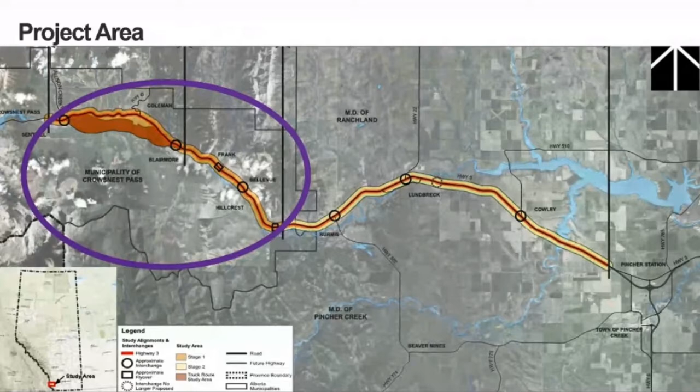So the orange part is generally through the municipality of Crowsnest Pass. This is a special municipality that was amalgamated in 1979. Coleman, Blairmore, Frank, Bellevue, and Hillcrest all came together and became one municipality. At the time, it had a total population of about 7,300 people. And it hasn't really been growing. In fact, it's been going the other way, and it's now down to about 5,500 people. But traffic volumes on the highway have been steadily increasing, which is how this project came about.

So because it's part of the National Highway System, Alberta Transportation has it designated as a future 4-lane freeway. Now, if you know anything about this highway right now, it's all 2 lanes. So there's a long way to go before we have a 4-lane freeway through here. But basically what they wanted us to do was to develop an ultimate functional plan for that long-term future when it's a 4-lane freeway. We came up with 110 kilometer per hour design speed. That's as high as you can go without having some big changes to the existing alignment.

We've got 7 interchanges and 1 flyover designated as future access across and to and from the highway, which is going to take a lot of service roads to accomplish because there's a lot more than 8 intersections through this 50 kilometers of highway at the moment. So there's going to be some major access management challenges involved with that. But then the big thing too was Alberta Transportation wants to know what their ultimate property requirements are, and this plan basically did that.

But I'm not going to talk too much about the freeway plan because it's a long way off. But what might happen in the somewhat near to medium future is the interim functional plan of twinning portions of this highway and doing some reasonable access management, not the full freeway-ification, but definitely consolidating some accesses. So that's what I'll focus most of the presentation on, the interim functional plan.

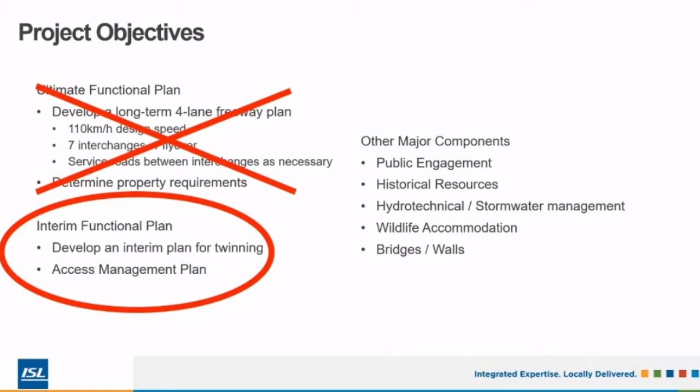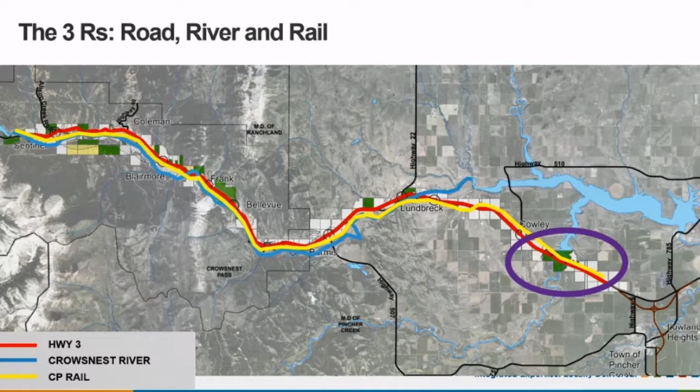You also might think, Jack, that sign doesn't look all that big. Don't you want to make it a little bigger so you can see it when you're driving down the highway? That text can't be more than 200 mils high or something. It's probably a lot smaller. But I guess the bigger you make the sign, the more susceptible it is to catching those winds. So they've got to keep it small.

All right, so let's look at the project stages. There's 3 distinct portions of this project, and I'm calling them A, B, and C for the purposes of this presentation; we had much more complicated names when we were actually doing the project. Stage A is the realignment around Coleman, and starts basically at the west end of the project limit and goes to Blairmore. It's about 10 kilometers long. That's completely new construction, building the new highway around Coleman.

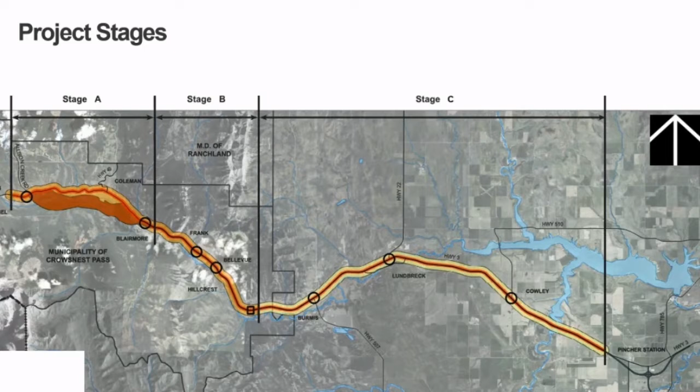Stage B is very constrained, mountainous, the most challenging part of the project from a design perspective, and it's all being twinned on the existing alignment. There's no major realignments. And stage C is once we get out of the mountains, it's a little flatter, a little more space, and just more wide open.

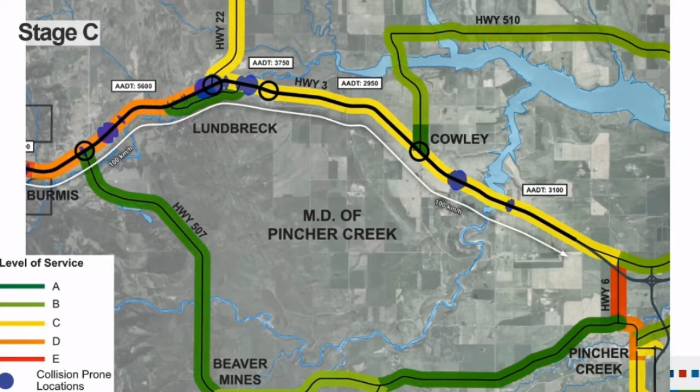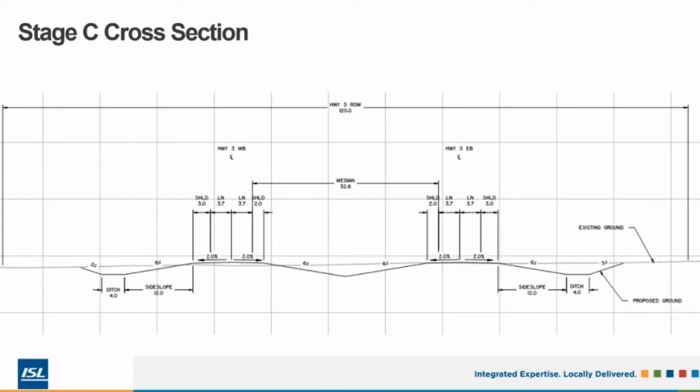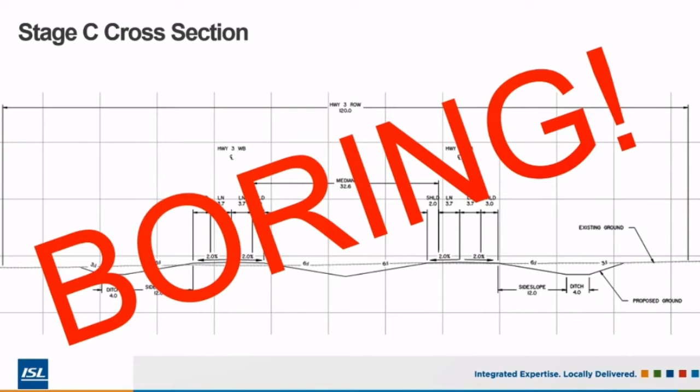And this is kind of boring. There's nothing really special or innovative about it. It's just a twinned highway, so not a whole lot more to say. So here's our recommended plan for Stage C. There's just a couple things that I want to touch on, and then we'll move on to the other stages.

But there's a vehicle inspection station just east of Highway 507. And so that can kind of stay while the highway is twinned, but as soon as you have to build an interchange at Highway 507, that vehicle inspection station really gets in the way. So we've got to shift it about 2 kilometers down the road to that wide space in the median we've created and put it right there.

The other hotspot that I mentioned is the Highway 22 intersection. And so to cool that hotspot off, you need a roundabout to manage traffic volumes there.

And the other major feature of this part is the Cowley realignment. So you'll see that the village of Cowley is right up against the highway. There's really not a lot of space to put an interchange in there in the future. And so we had to realign the highway around Cowley so that once you have an interchange there in the future, then you've got space from the interchange junction.

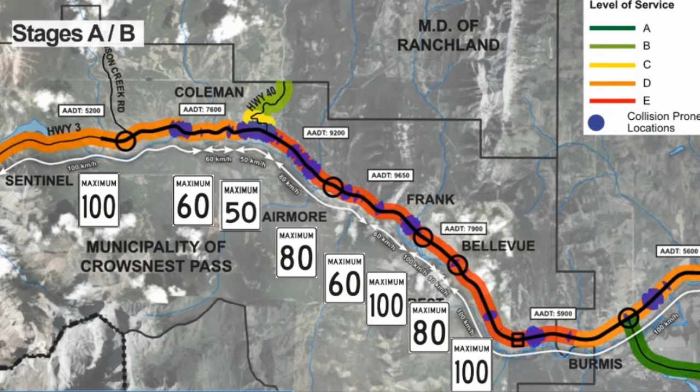Okay, going along, going around Blairmore, coming into Frank. Oh, 60. Ooh, okay, slow down. Oh, back up to 100. Back down to 80 through Bellevue, and then once you get past the Bellevue intersection, you're back up to 100. So not exactly a harmonious speed profile there, and really hard for drivers to remember what the speed limit is and drive accordingly.

So let's look at stage B. So here is the quintessential problem of stage B. We have a mine and a big rock cut on the north side. And on the south side, we have more rocks, some sloping, and the CP rail. It looks like we've got a fair bit of space. Like, yeah, we could probably widen to the south, stay away from that mine. It's kind of a tourist attraction. There's some geotechnical challenges with blasting rock away right where it's dug out for a mine. But there's the property line for CP rail, that fence line right there.

And it became apparent to us pretty early on in the design process that all of stage B really needs to hold the existing edge of pavement of the highway on the south, and widen all to the north. Because anytime you start going to the south, you start having to slope onto CP land, and they don't like that. That just opens a whole other set of challenges that we really weren't prepared to deal with.

So the cross section for Stage B was inspired mostly by what I like to call the Okanagan Special. This is the cross section that most of the new twinning in British Columbia in these mountainous regions has been in the last 15, 20 years. All the twinning they've done is pretty much this Okanagan Special.

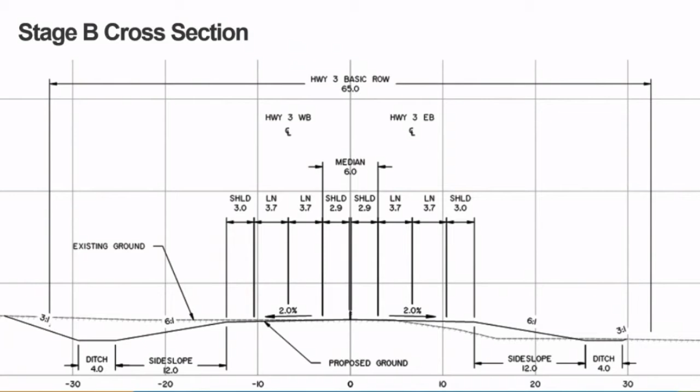The one major difference that I'll highlight here is a high tension cable barrier down the middle rather than concrete median barrier. Local officials and maintenance people were pretty wary about putting concrete barrier down the middle. They were very concerned about snow drifts and the high winds and stuff that the area is famous for. And so that's how we wound up with high tension cable barrier.

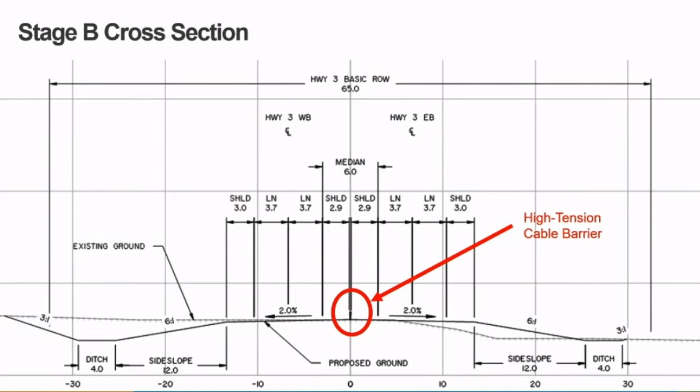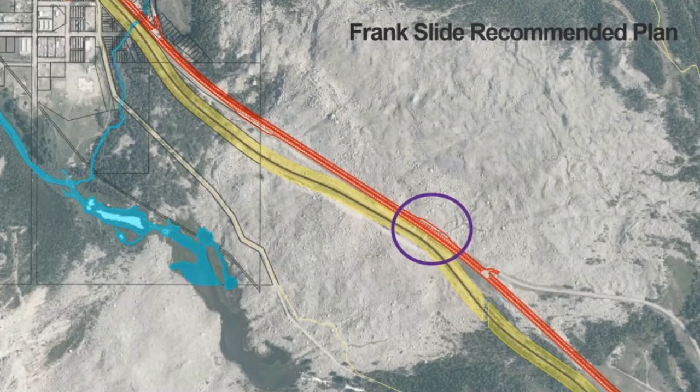So here's the recommended plan. And again, we don't know what kind of hoops are going to have to be jumped through in the future to make this happen, but because of the proximity of CP rail, hold south edge of pavement, widen everything to the north. And you'll see there's the pinch point with the CP right of way, where there's even a little part of the existing highway pavement that's technically on CP right of way, but don't tell them.

So now moving a little ways up the road, this is the current town of Frank. And it's pretty tight. So again, we've got the rail on the south, but then on the north now we have new challenges. We have private frontage, we have people's homes, we have people's driveways, we have businesses. And the right of way here gets down to about 27 meters. And if you'll remember, our twin pavement width is 26.6 meters. So we're really in tight here. So it's private frontage to the left of me, CP rail to the right. Here I am stuck in the middle with not very much space.

So shout out to McElhanney here, their 2007 study of the area took a look at this problem in Frank and what are we going to do about it? And their solution was, well, ultimately you're going to need a service road for Frank. And so let's make the existing 2-lane highway the service road, build the new 4-lane highway to the south, and completely relocate CPR in the process and just push them further south.

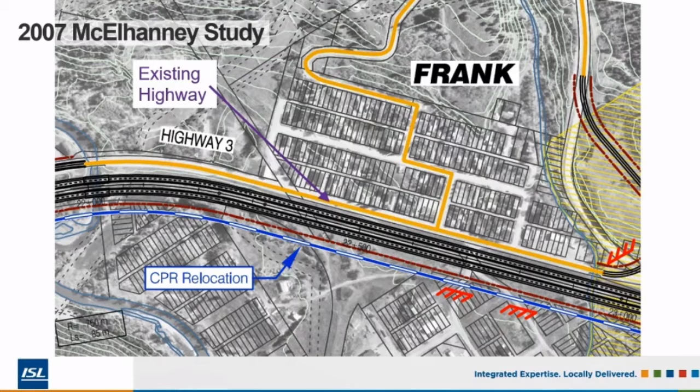And it seems like a pretty good idea to me, nice and clean, makes use of the existing infrastructure for a future service road. But once we got into talking with Alberta Culture and Heritage, it became apparent that this relocation plan might not work.

You could try to realign the railway to the south of it, and squeeze the highway in the existing rail right-of-way. But then you're starting to look at a really long realignment of the rail and new river crossing structures for the rail, all that kind of thing. And it just started really spiraling out of control of how long this rail relocation would need to be.

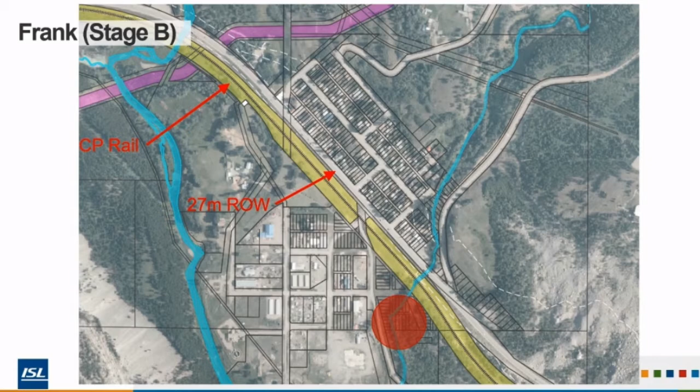And so then we kind of revert back to hold the existing south edge of pavement, widen to the north. So this is the recommended plan in Frank. And it's not great. It takes out that whole first row of properties in Frank. So the gas station, the art gallery, some restaurants, the liquor store, and a number of homes.

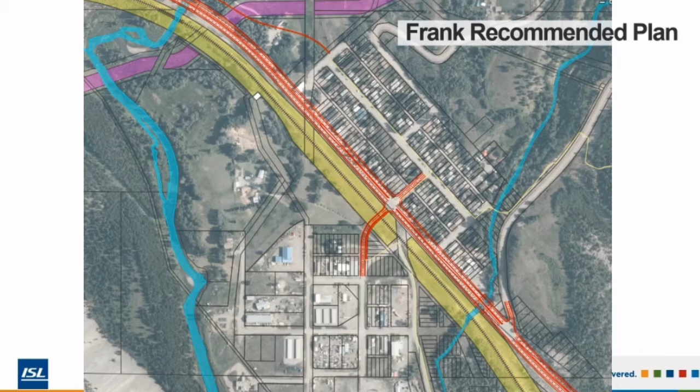Alberta Transportation is going to have to acquire those in order to twin the highway through here. So definitely not an ideal solution. It's never the kind of thing you want to have to do, but there's not a lot of options through here. It's very constrained. So let's move on to stage A.

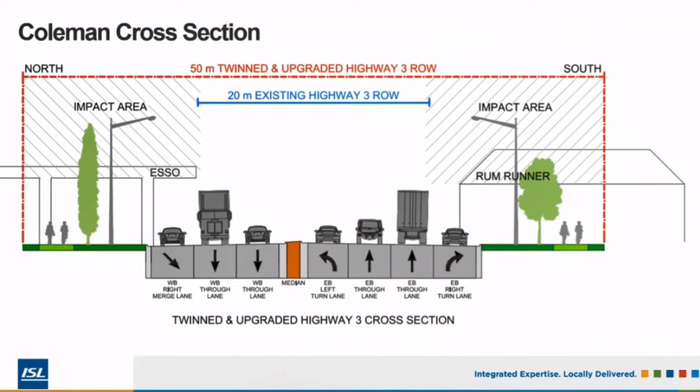So we thought, okay, well, maybe we can't get a freeway through Coleman, but maybe we can get an expressway or arterial style twin highway through Coleman. But even as tight as you can go with 4 lanes, as soon as you start needing left turn lanes at intersections and stuff, it starts taking out both sides of the road, no matter what you do. And not a great end result.

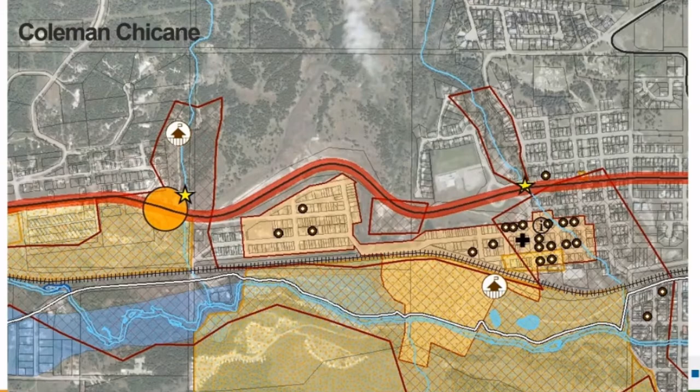And you also have the problem with this chicane. These curves are all under 300 meters in radius, and the tightest one I think is 170. And you could try to straighten them out, but then you're going through a neighborhood, which again, we already did enough of that in Frank. We've had enough. So confirmed, yes, we need a realignment around Coleman.

The previous McElhanney study and a couple other studies had confirmed that going to the south is the way to go. There's just too many issues going to the north. So let's see what we can do. This doesn't look too hard. There's one other major constraint though, and that's this big black line is 2 major gas pipelines. These are the primary pipelines getting gas out to Vancouver. And so these are big. These are both about 2 meters in diameter.

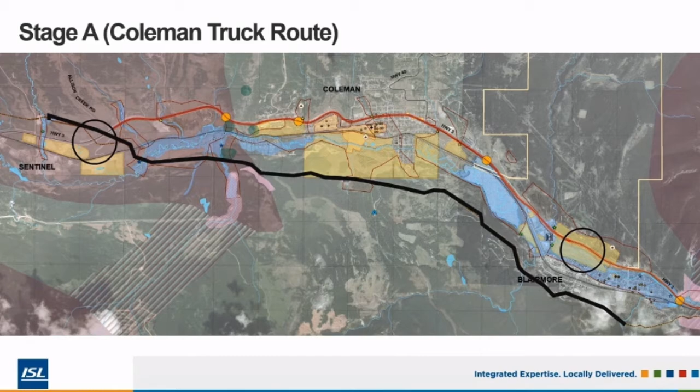And that quickly became a do not touch thing. And so what can we do? How can we get a highway through here that does not touch those pipelines? Because touching them would be very regulatorily and logistically expensive and not great for the project.

So I came up with 14 different alignments that didn't work and one that kind of did. So pretty much the average of the other two. We tried going as far north and as far south as we could. And we wound up with this one. It doesn't touch the pipelines. It stays far enough away from people's homes in Coleman that hopefully we don't have any problems there. But that's what it looks like.

Now, there's a couple major bridges that are required for this alignment. One there at the west end that goes across the pipeline and the river, and one over here in Blairmore, which goes over a local road, the CP rail, and the river. The west bridge is about 150 meters long, and the east bridge is about 250 meters long.

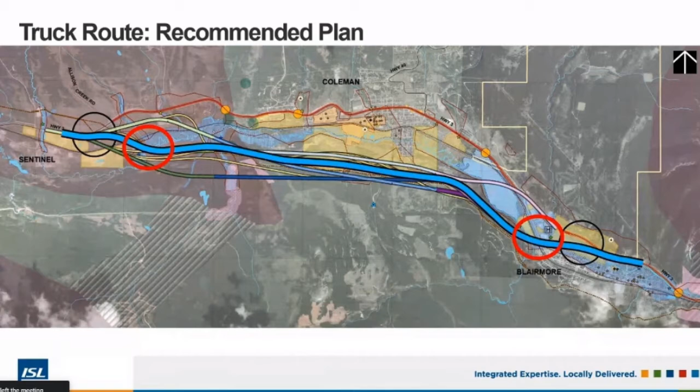And so Alberta Transportation definitely wants to avoid building giant bridges right away as much as they can, and that started affecting the staging considerations of this truck route.

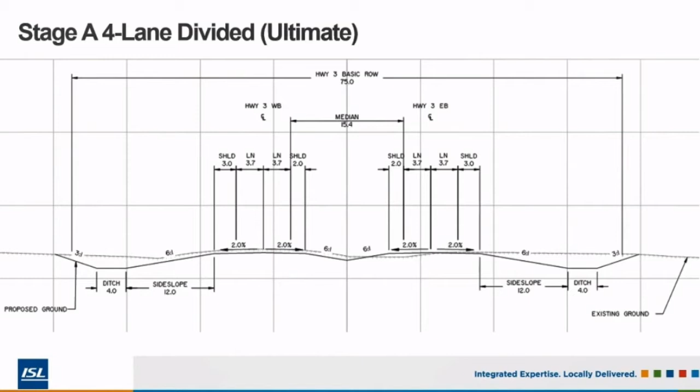So here's the cross section. It's kind of a happy medium between what we wound up with for stage C, which was wide open, and stage B, which was very constrained. This is kind of more in the middle, 15-meter median. It's depressed. It's not the super wide that you would get if you had all the space in the world, but here we don't. So this is kind of what we could squeeze through on that alignment.

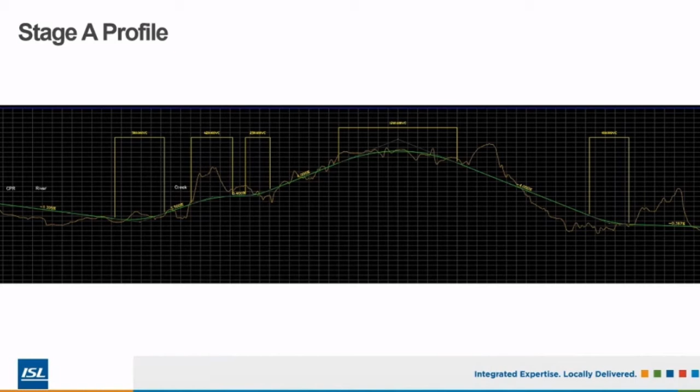And here's the profile. So you'll see it's kind of characterized by a big upgrade and a big downgrade. And that triggered the need for climbing lanes in the initial build-up. So if you only build 2 lanes through here, again, you're just kind of putting a 2-lane highway around Coleman, and the level of service won't be a whole lot better.

So in order to allow people to get around slow-moving vehicles, which there are lots on 4% grades like that, you need climbing lanes. And so you can see there is a short stretch where you even need climbing lanes in both directions. So you kind of have to build the full twinned highway anyway, and it wouldn't really make a lot of sense to build a 2-lane highway with climbing lanes on each side that then you'd have to remove and rebuild separated when you fully twin the bypass.

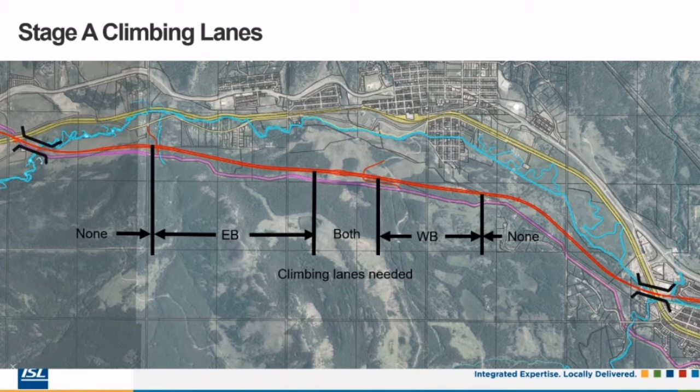So that led to interesting cross sections. So this is one where, if you need westbound climbing lanes, you have your 2 lanes westbound, and then you have your median, and then you build most of the eastbound carriageway, but only build it wide enough for 1 lane of traffic, and no throwaway pavement in the future. It doesn't really involve any kind of interim grading. It's just kind of a nice, clean way to stage this portion of the highway.

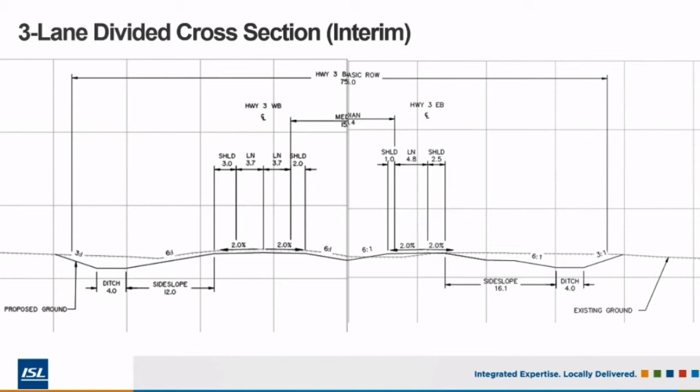And you could even get to, depending on how things are determined once this is built, you could wind up with a 2-lane divided cross section, which I think would be pretty neat.

So here's the wildlife mitigation plan. I think the ultimate build out of this is going to look a whole lot like driving through Banff National Park. Lots of overpasses and underpasses for wildlife, and wildlife fencing on both sides of the highway for most of the entire corridor. And that will get those animal vehicle collisions down a lot.

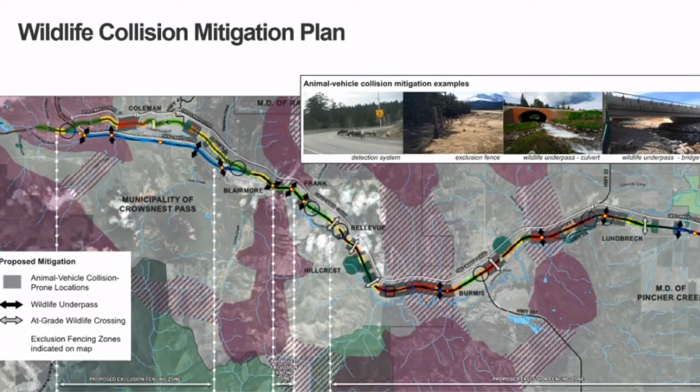So the one local landmark that I haven't touched on yet is the Burmis Tree. This thing is 1,000 years old, they say. It doesn't look a day over 650, if you ask me. And it's so popular with the locals, it even has its own brand of beer, which was the official libation of the Highway 3 project.

Lastly, just wanted to mention Feroz Kara. He was the project manager for Alberta Transportation for this project. And this was kind of his going out party. It was his last project, and once it was finished, he retired. And that was earlier this year, and we just found out a couple weeks ago that he's now passed away. And so we just wanted to offer our condolences to his family and wish them all the best.